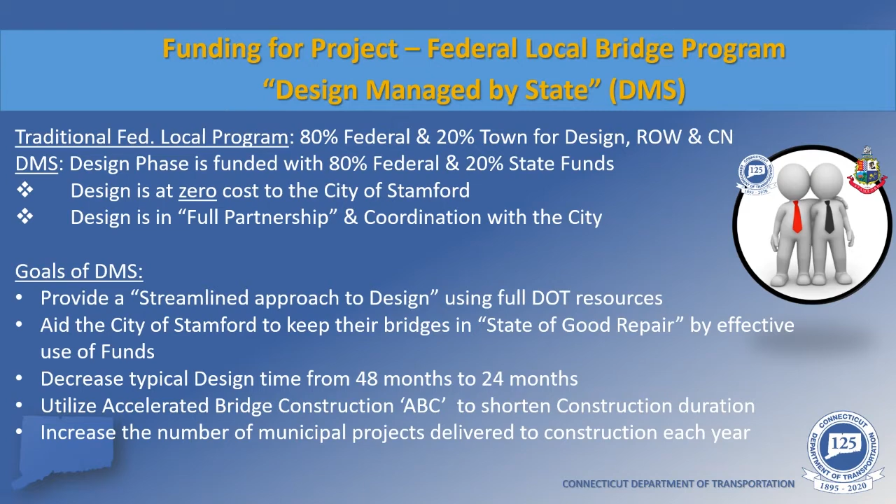Hello and good evening, everyone. My name is Ivanka Barasic, and I am a staff engineer for the City of Stamford. The DOT performs safety inspections for all bridges over 20 feet in length at 2-year intervals.

The Wire Mill Road Bridge was flagged as one of the bridges in the city that needed repairs. Given that the bridge needed to be replaced, we were looking for the most efficient and cost-effective way to proceed and stay within the guidelines of the allocated bond money.

Traditionally, the city would have selected and hired a consultant to develop the design, and they would have been responsible for creating bid documents, with the city covering 20% of the design costs.

As Preeti mentioned, when the Department of Transportation offered the DMS program to the city, where the design is managed by the state with 80% funded by the feds and 20% by the state, we felt that it was a win-win solution for the city, since the state's pre-selected consultants would have better knowledge of the design process, resulting in both an early completion of design and construction, not to mention the cost savings.

We started meeting with the state in June of 2018 to get an understanding of how the program worked and how it would benefit the city. After several more meetings, the city recognized that this program would be a good fit and agreed to go forward with it. While the design efforts have been led by the state, they have kept us in the loop on all aspects of the project.

This includes providing us with various technical alternatives, their pros and cons of each option, and recommendations. They have also informed us that it is the city that will be making the final decision on all design aspects. This process has been followed diligently, and the city thanks the department for truly partnering with us on fixing the city's infrastructure.

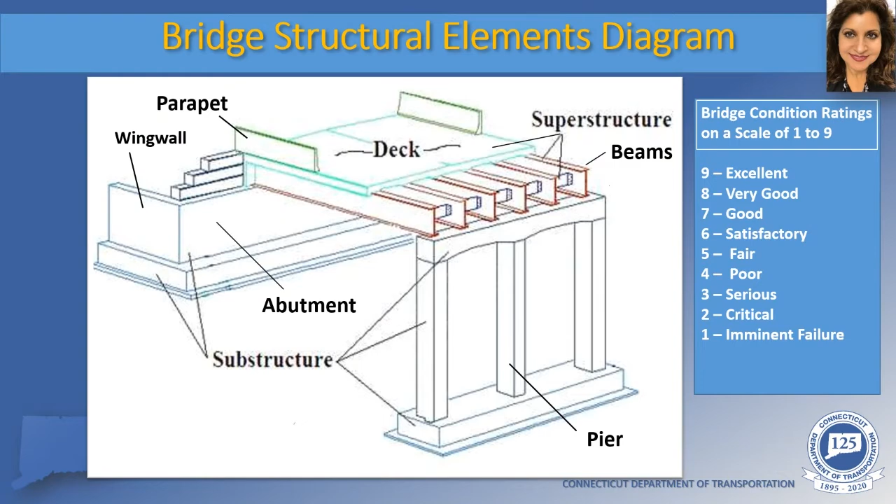Now that you are armed with basic bridge knowledge, I would like to introduce Mr. Daniel Carnine, who will be presenting the technical portion of the presentation.

Good evening. My name is Dan Carnine from Close Jensen Miller. I will be presenting the technical portion of tonight's presentation. Bridge number 4070 carries Wire Mill Road over Haviland Brook and is located 0.3 miles west of State Route 137.

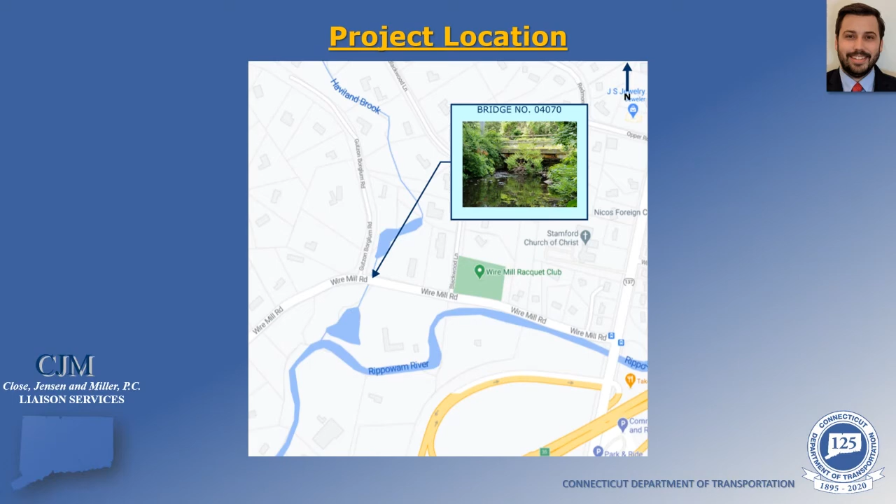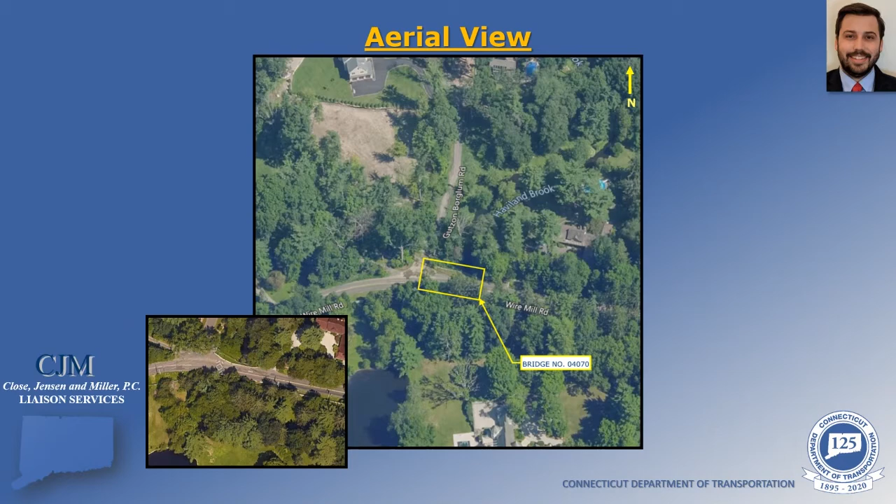Here's an aerial view of the site. The bridge is located in a primarily residential area with a few houses, driveways, and fences in the vicinity of the bridge. To the west is the intersection with Gutzon Borglum Road, and just before the intersection, on the west approach, is a traffic calming speed bump.

The existing bridge was originally built in 1957 and consists of a steel beam and reinforced concrete deck superstructure supported by reinforced concrete abutments and wing walls. The bridge has a total structure length of 25 feet and an original curb-to-curb width of 30.5 feet. More recently, the curb-to-curb width has been reduced by temporary barriers, which can be seen in the right picture. The barriers were installed along the bridge shoulders to reduce traffic live load on the outside beams.

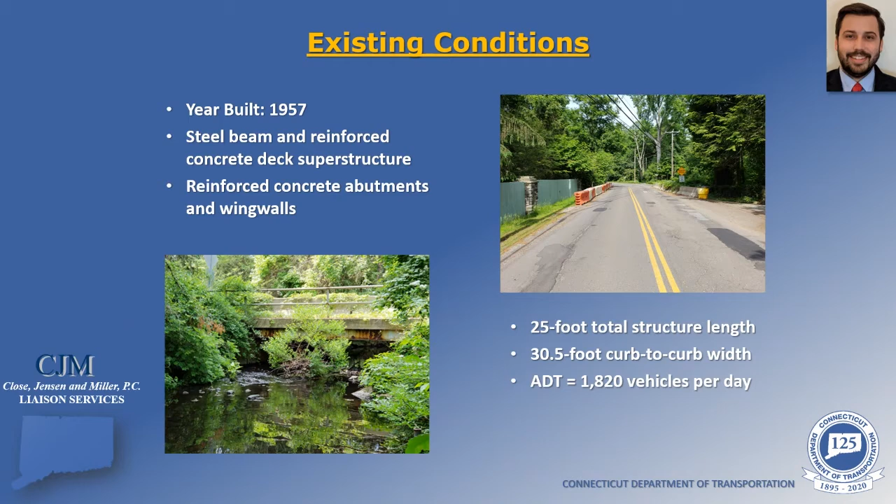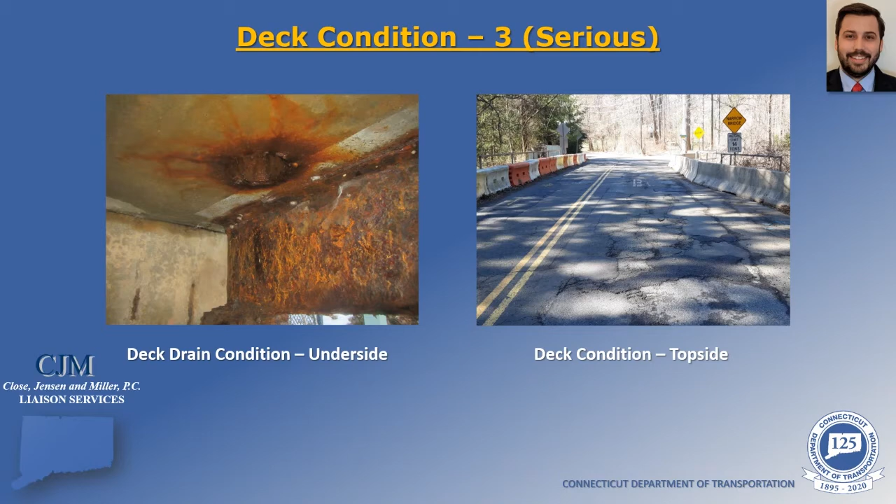The existing deck is in serious condition with an overall rating of 3. There are hollow areas and honeycombing up to full width and full length of the bridge bay, with 75% of the deck underside deteriorated. There are also damp areas near the existing drain holes, which can be seen in the picture on the left. The picture on the right shows the deck condition on the top side of the bridge.

The superstructure is also in serious condition with an overall rating of 3. The fascia beams, or the outside beams, exhibit severe section loss at the beam ends, and there are heavy areas of laminated rust. Traffic has been removed from the fascia beams with the use of temporary barrier on top of the structure, and the bridge has been posted for a 14-ton load restriction.

The substructure is in satisfactory condition overall, with a rating of 6. There are isolated areas of cracks, hollow areas, and spalls throughout. There are also areas of minor to moderate scaling along the waterline.

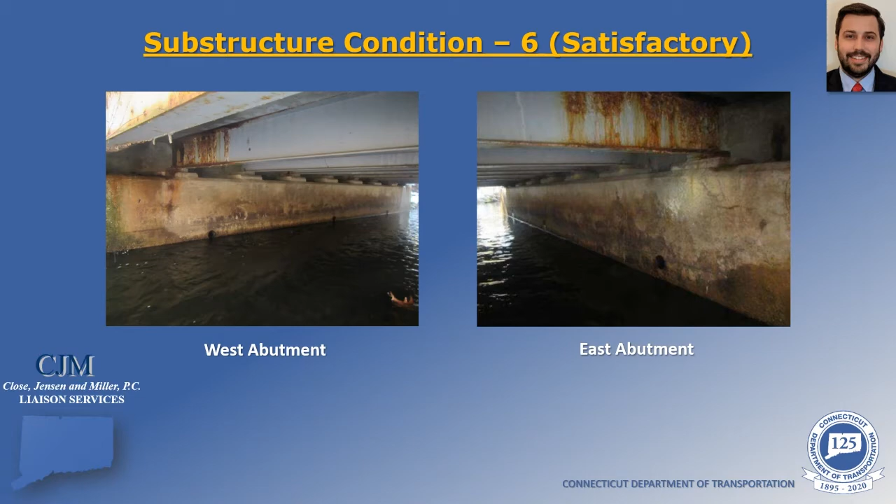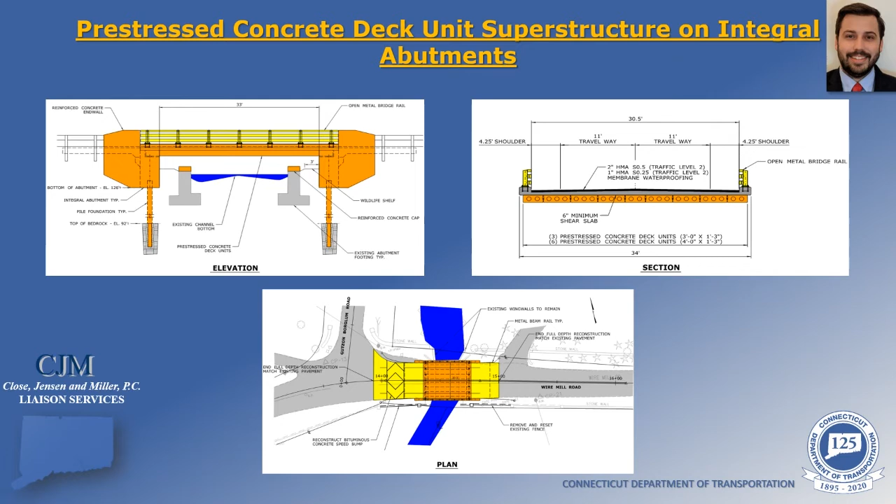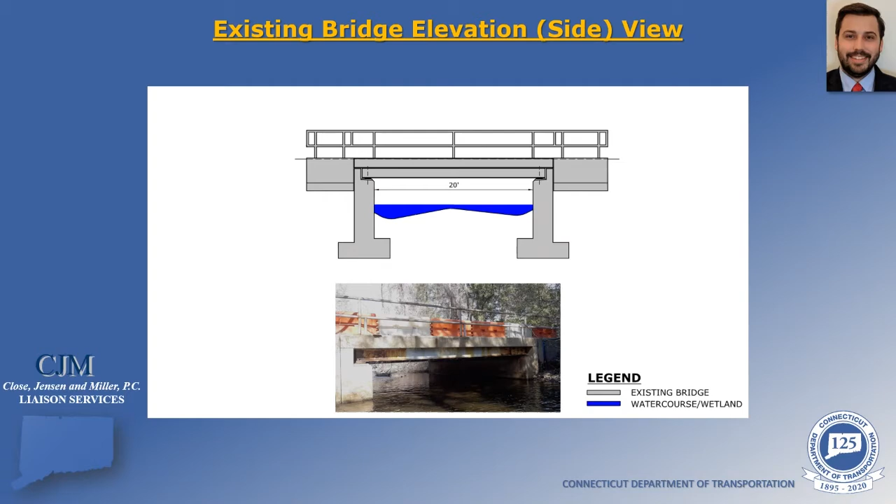Now this is an elevation view that shows the side of the proposed bridge. The proposed span will be increased to 33 feet to allow construction of the new concrete abutments behind the existing substructure. There will also be room for wildlife shelves on both sides of the brook to help prevent any wildlife from crossing the road. The top portion of the existing abutments will be removed and reinforced concrete caps will be constructed on top. These caps and the existing abutments will help maintain the existing channel.

On top of the bridge, open metal bridge rail will be installed across the structure and terminate into reinforced concrete end walls at all 4 corners of the bridge.

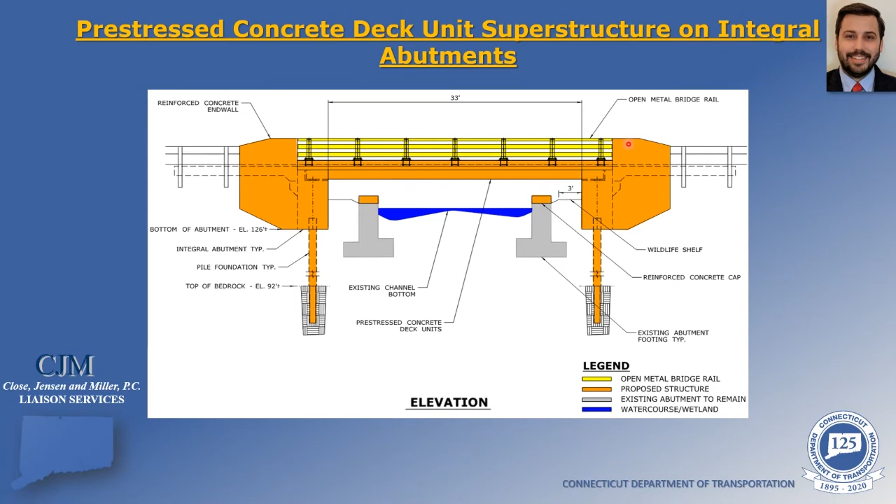Here's a cross-section cut of the proposed bridge. The curb-to-curb width will be 30.5 feet, consisting of 2 11-foot lanes and 4.25-foot shoulders. On top in yellow of the cross-section is the open metal bridge rail. Below that, you can see the concrete slab in gray, and then the pre-stressed concrete deck units in orange.

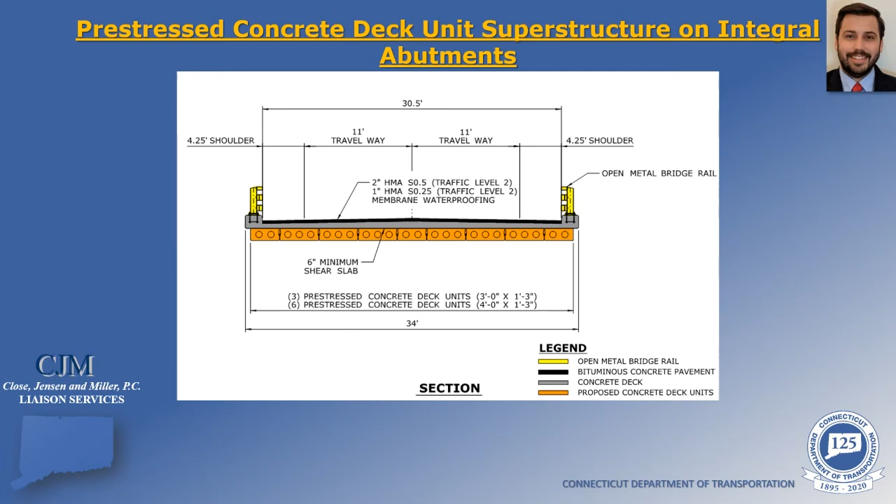These are pictures from recent projects to show what the proposed superstructure would look like. The top picture is an example of pre-stressed concrete deck units on top of integral abutments. Both pictures show different types of open metal bridge rail installed along the road across the structure.

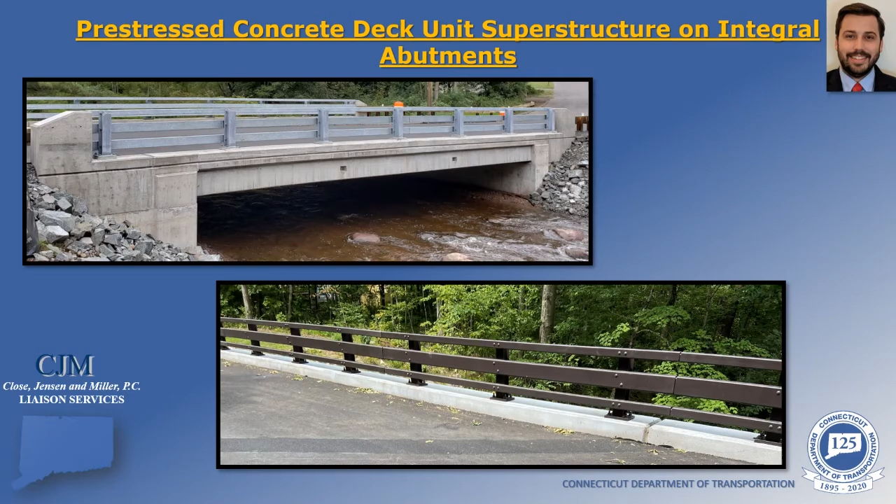Here's a plan view of the site, looking down over it. You can see the brook in blue and the proposed bridge in orange.

On both sides of the bridge, in the yellow areas, the roadway will be reconstructed and new pavement installed. New guide rail will be installed along the approaches, and the traffic calming speed bump will be reconstructed on the west approach. Fencing on the south side of the bridge will have to be temporarily removed and then reset after construction.

The existing roadway profile will be maintained as close as possible. This slide shows the vertical profile of Wire Mill Road. You can see the bridge in the red area is located on a crest curve, with the roadway high point located on the bridge.

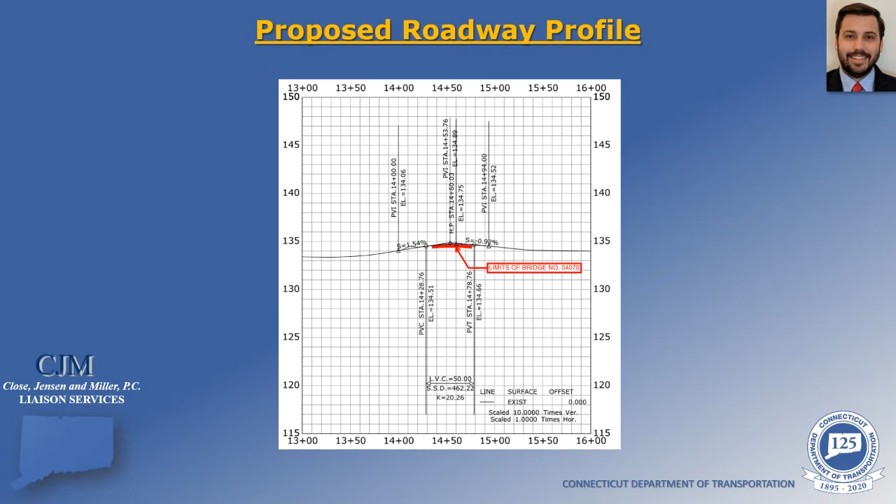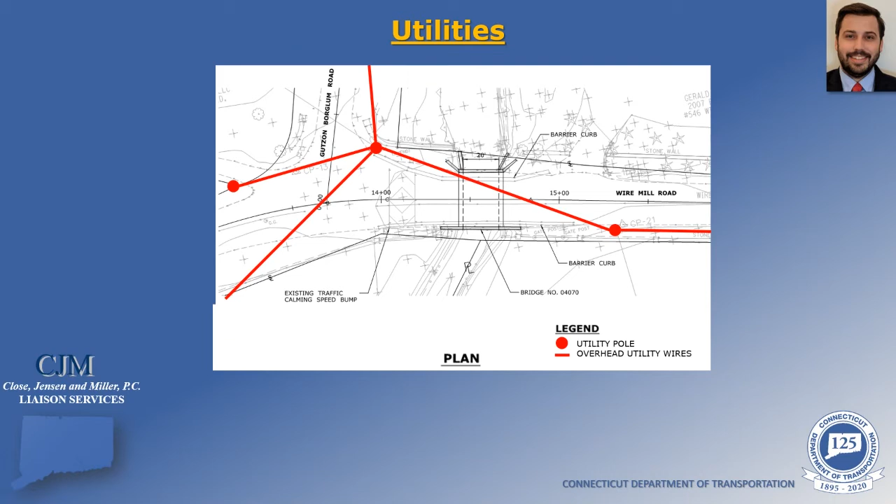There are overhead utilities located over the bridge. These overhead wires will need to be temporarily relocated to accommodate construction and crane activities. We do not anticipate any disruptions to power, phone, cable, or internet service.

Construction must utilize a 2.5-mile detour consisting of state and local roads. Vehicles following the detour from the west side of the bridge will have to follow Wire Mill Road, turn left onto Cedar Heights Road, turn left onto Route 137, and then a final left back onto Wire Mill Road.

Construction staging with alternating one-way traffic is not feasible because the existing bridge with the barriers is too narrow.

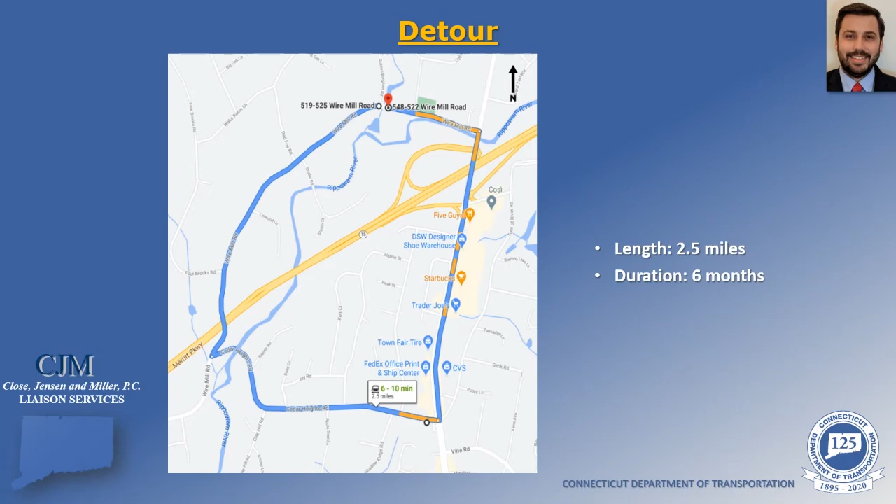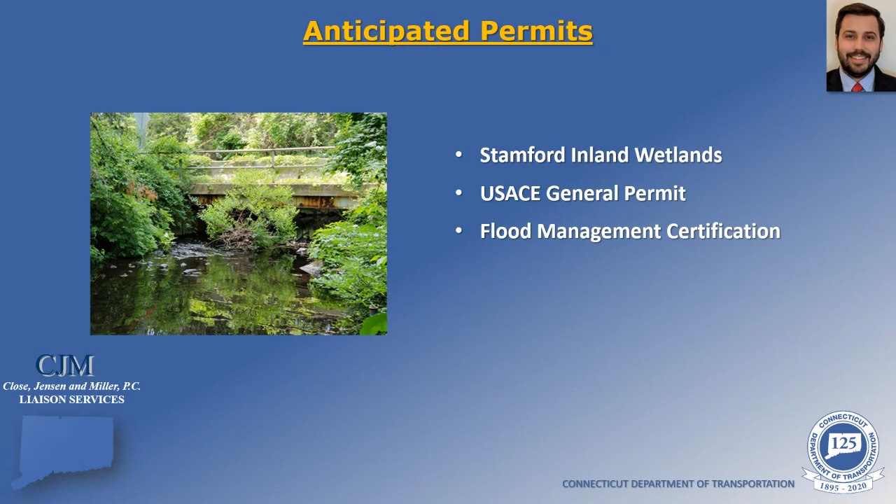This concludes the technical portion of tonight's presentation. I'll now hand it over to Dennis McDonald from the Department's Division of Rights-of-Way to explain the rights-of-way process.

Good evening, everyone. My name is Dennis McDonald, and I'm a representative from the Connecticut Department of Transportation, Division of Rights-of-Way. I'm just going to provide a brief overview of the right-of-way process.

The function of the Division of Rights-of-Way is to acquire all property and property rights necessary for the project. This is done in accordance with Connecticut General Statute Section 13A73, 13a-98e, and the Uniform Relocation Assistance and Real Property Acquisition Policies Act of 1970 as amended.

Your typical right-of-way impacts include partial acquisitions, easements, and rights. Impacts are subject to change as the design progresses, but this gives a general idea of typical property impacts.

Once property impacts have been established, each impacted property owner will receive a letter of intent to acquire along with a property acquisition map. The letter essentially initiates the right-of-way process, and the map provides a detailed overview of the specific right-of-way impacts. Soon after the letter is received, the valuation process will take place.

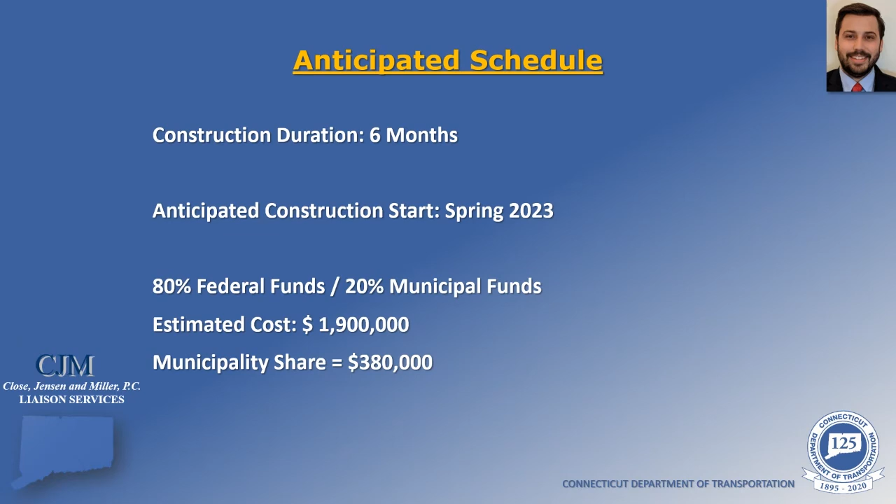Next question: is there any thought of coordination of this project with the planned state DOT reconstruction of the Merritt Parkway exit 35 and High Ridge Road intersection? Dan: when we first presented this project to the department and coordinated with other units at DOT, this project was brought to our attention, and we've been reaching out to them and coordinating on their exact construction duration. Right now with the construction schedule, we don't see too much overlap with that project, but we'll be coordinating to make sure the detour for Wire Mill Road isn't impacted. There is full coordination on all other projects in the vicinity, and we make it a point to ensure there are no conflicts or interference between our construction and those other projects. We're always mindful of that.

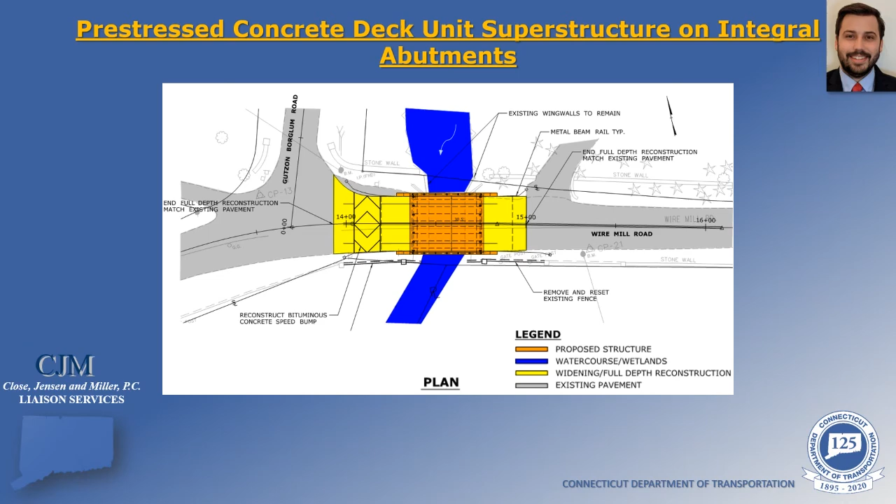Next question: where will the contractor place his equipment? Dan from CJM: because construction is utilizing a detour and the roadway will be shut down, the contractor will likely store equipment within the closed roadway portion. That said, the contractor will not be allowed to block access to Gutzon Borglum Road or any of the adjacent driveways near the bridge.

Next question: can stage construction be used instead? Dan from CJM: we looked into staging construction for this bridge and maintaining one lane of traffic, which is why a detour had to be used. We determined stage construction is not feasible because we can't accommodate one lane of alternating traffic, since the bridge roadway width is already reduced by the temporary barriers out there today. We also don't want to move traffic closer to the edge of either side of the bridge due to the existing deterioration on those outside beams. This is why ultimately a detour was chosen for this project.

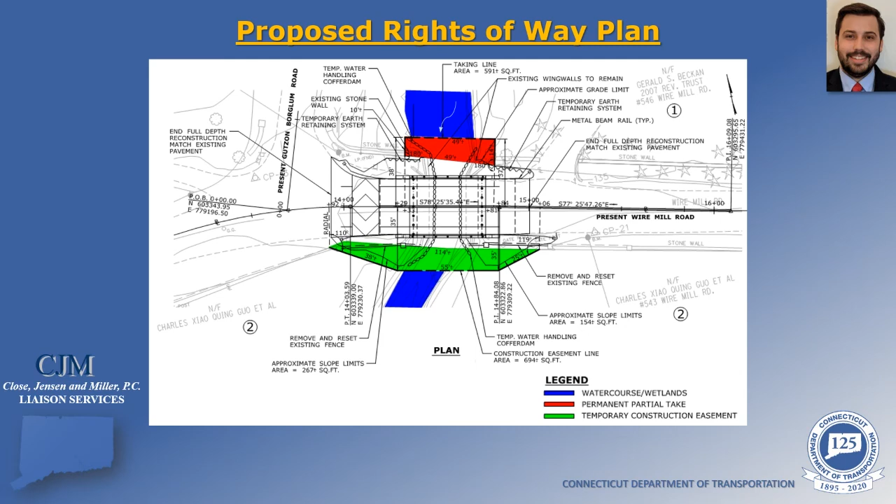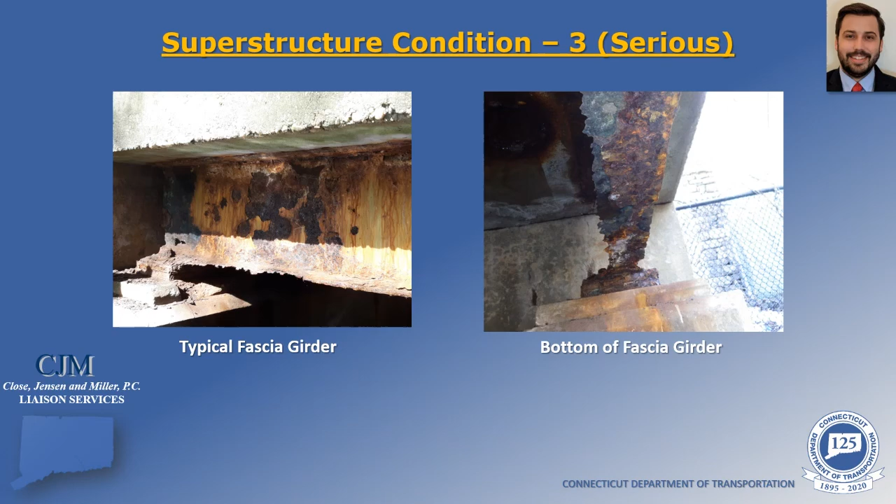We have other bridge projects we've done in Stamford over the last few years, and if you've driven through those, you've seen the heavy equipment used by contractors. Storing that equipment with a narrow existing roadway is a big safety concern. That's why, where feasible, we like to do these detours and keep the traveling public away from the heavy equipment while the contractor is working. We think it's a safer condition, and on this project, it makes sense.

Let's see, we have another question. Will mail delivery be impacted, and how will EMS be coordinated? Dan from CJM, can you please take the question, and Savanko, if you want to add in as well.

Sure. On all of our projects, we coordinate with city officials throughout the design process to make sure all necessary public services are notified, especially when there's a detour involved, like in this case. This includes police, fire, EMS, schools, and mail service. All of these services impacted by the detour will be invited to a pre-construction meeting where the exact detour schedule will be provided, and during construction there will be ongoing coordination between the contractor, the city, and those services.

We also coordinate with our traffic department, which has a traffic advisory committee that usually meets once a month. We present the project there, and traffic engineers, police, fire, and usually all emergency services attend, so they know well in advance that this project is coming. They plan for it, and as we get closer to construction, we iron out the details of advance warning signs and advance notice in the paper so the public is aware. It's an ongoing coordination effort with all emergency services and our traffic department to make sure everyone's on board and there are no surprises.

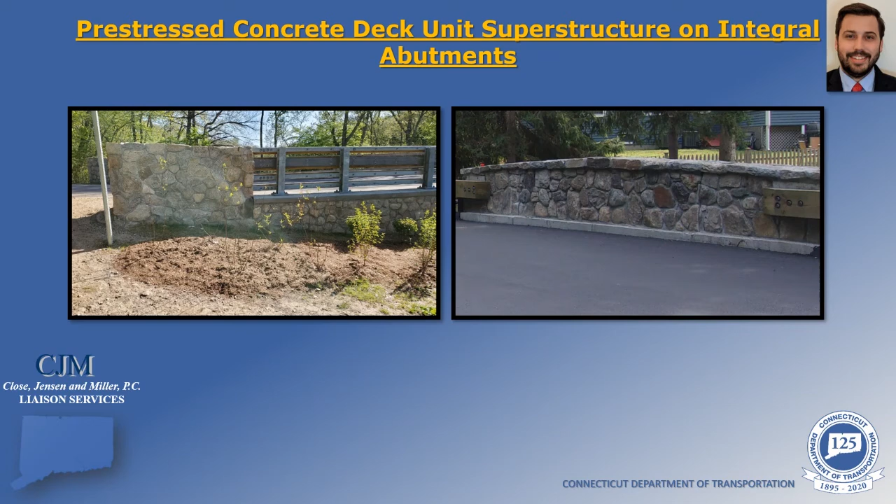I'll give it a couple more seconds to see if any more questions come in, while Preeti adds one more thing.

People are usually concerned about funding. We have a capital bridge account that we use for all of our rehabilitation and replacement of bridges. This road is listed in our program to be replaced, so the funds are in place, and there are no issues on the city's end as far as funding this replacement project.

Excellent, that's wonderful to hear. All right, I don't see any more questions coming in, so I'm going to take this opportunity to start wrapping up.